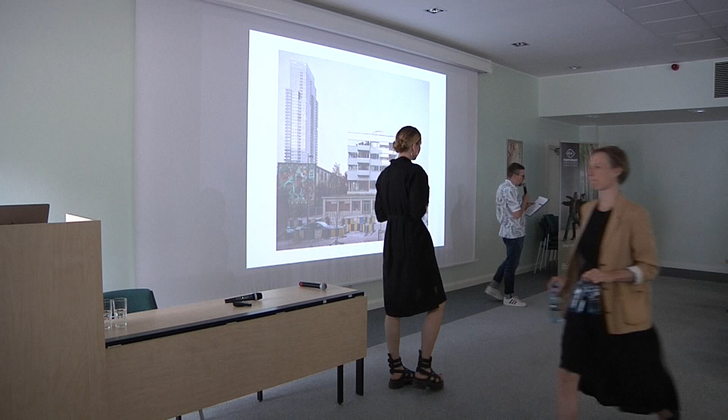Marija Katrina Dambe and Florian Beta, and the company is called NOMAD Architects. NOMAD is an architecture office focused on circular and timber architecture. They combine planning, research and hands-on work with activism. We understand the discipline of sustainable architecture as a collaboration between many actors. Thus, the aim is to work closely with construction teams, engineers, municipalities and all other players of the value chain.

Just one person on stage, only you. Yeah. Okay. Florian stays in. So, can you hear me? Yeah. I do. They do. You hear me well. Okay. If not, then show us. Try. Okay. Say something good in Latvian. Draugs. Yeah. Okay. Oh yes, you can start.

So yeah, I'm Marija from NOMAD. What I'm going to speak about is the gray zone of circularity, and it's me alone on the stage, and I feel quite a bit stressed because we are a super small office. Actually, it's just me and Florian. He's sitting there. And after the previous presentation with such large projects, we do very small things. But we somehow tick the box on use of materials and tracking their flows.

And so I'm going to tell a bit why the gray zone, because usually when we're invited to speak somewhere, we end up having to tell how we are doing things kind of legal, kind of loophole-ish. So I just honestly call it the gray zone, and that's kind of what we do. So just a bit of background. As we define ourselves as an office that deals with circular construction, circular architecture, we usually refer to construction to encompass that we're not only drawing, but we track down what happens afterwards.

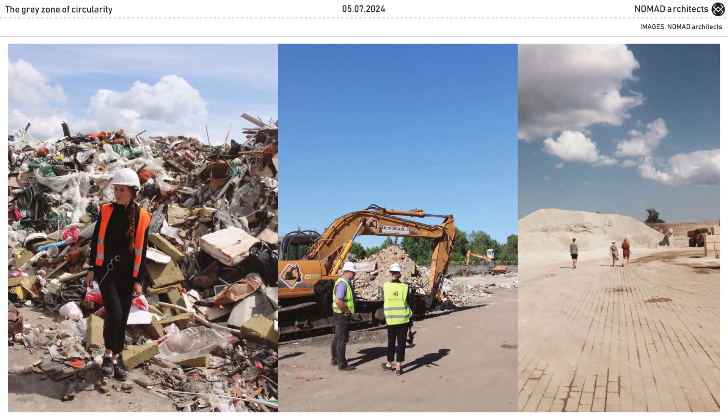So just as an introduction, this is our daily life. We are part-time at the office, but part-time we are on waste sites, demolition sites, also abroad, that's a Tartu construction waste site, and so on. So we spend our days between the things that we draw and actually looking at what happens to the buildings at the end of their time. But about it seeming like a very new thing, I usually like to point out that what we do is not new at all. Actually, not doing it is somewhat new.

And we can go back 2,000 years, and we find even ancient laws forbidding someone to make business by demounting and reselling materials. So kind of the ultimate thing we want to do right now. So we are pretending that it's something very, very new, when in reality it's not at all. And what we are doing right now, completely overusing the resources, this is the thing that is quite new.

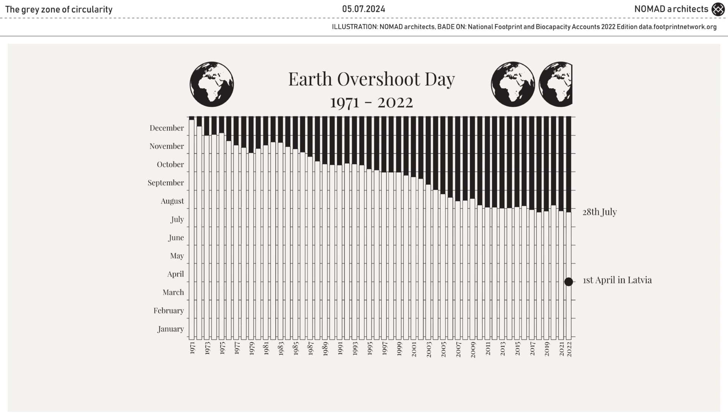And coming from Latvia, a super small country, kind of close to Estonia, it's often said that we should put these questions to countries that have more population, which are larger, wasting more, building more, and so on. And I usually like to show this graph, which is Earth Overshoot Day. It's the day when we have used the maximum resources that can be self-sufficiently replaced and start taking from the future. And if the world average is right now the end of July, the Latvian average is really bad. We're starting in April and already taking from our future resources. This is why even in a small country with rather little construction, we still have to speak about circularity.

So what I mentioned about saying that circularity is something new or feeling like it's something new, we have all these topics of new standards, how to reuse things, how to check the safety, how to build in a circular manner, and so on. And there's so much information on it, and actually we ourselves are also participating a lot in contributing to that amount of resources on how to build.

This is in Latvian, I'm sorry, but it's guidelines for Riga municipality for circular construction. And actually, if you track the last years, there's a lot being done in how to build, but there's kind of nothing done. So we're only speaking and always somehow getting stuck. And if you don't want to believe me that nothing is being done, then this is a project we did one year after we started our office.

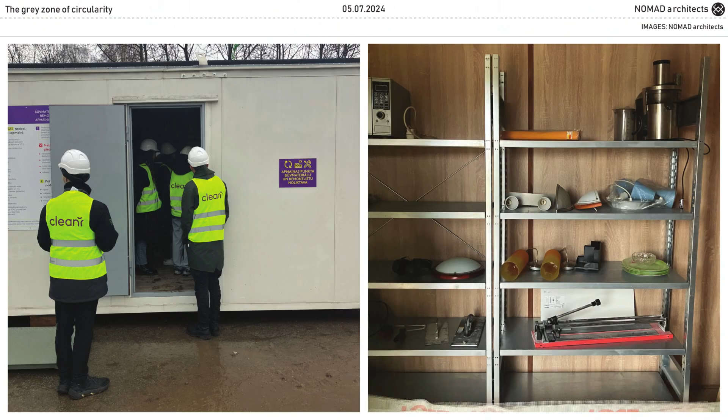So actually by the law, we don't have any circularity written in. We don't have reuse, we don't have upcycling, recycling, we have only downcycling possible in the law. And when you're building a new building, of course you have to account for where you are sourcing your materials. And you cannot say that you took a material from one building and brought it to the other, because you're an architect, you're not waste handling personnel. So actually you're not allowed to do that. So this is basically the reality, and this is what by law is understood and allowed to showcase circularity.

So what you can take is lamps, some old cutting devices and so on, actually nothing that has to do with the construction sector's waste in reality. So just to give you a background.

And then if we go further, this is a project that we did as research, I think 2 or 3 years ago. For the Riga municipality, we were asked to assess this abandoned 1970s service hotel, if this could be renovated in a circular manner. So again, it touches it on a very theoretical level. Can we do it? And then if we can, we will try to figure out how to do it by legal means somehow. This is also the reality; I will later have pictures from some other projects too.

I don't know why everyone feels that for the circular economy we should get the most run-down buildings, why we cannot experiment with something that actually has some material value left, but maybe that's the case. No one feels sad if this fails. But yeah, this stands quite centrally in Riga, not in the old town, but a rather centrally located building. And so we played through all the scenarios with other students of ours.

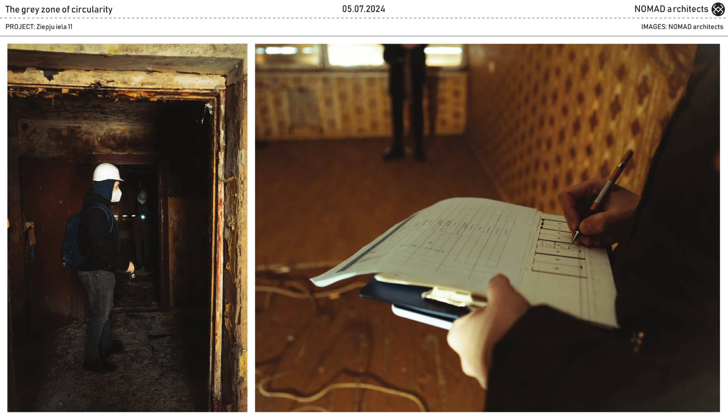It had only the room plans, but it had no documentation of what it's built of, anything. The city archive had no info on this building. It had only the foundation plan. That was the only info. So in a means of, okay, let's renovate it in a circular manner, we actually have to know what it's built of.

So we sent in the students and they mapped really floor by floor, room by room, all the materials they could find, looking behind at what it's made of, and made a lot of assumptions, and then tried to count also the volumes of those things, the condition of it, can it be demounted, can it not, and so on. And you can see the table then with all the mapped materials, giving them identification, and so on.

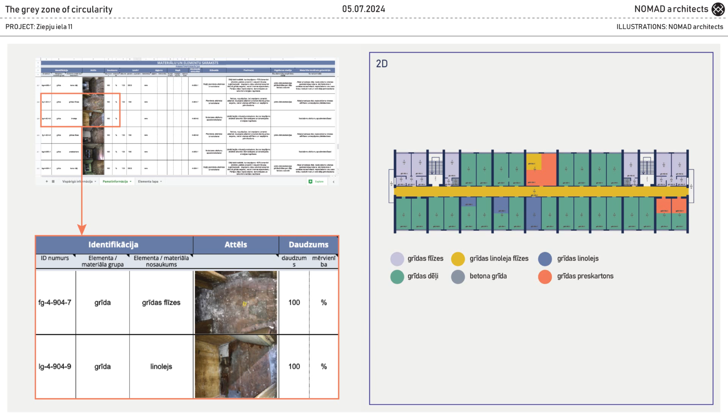And then mapping these also within the building, because there were all kinds of changes done also in the floor plans. And if it comes to the renovation phase, one has to be able to find those materials that we speak of and try to map these. And so at the end, we finally had what the building is made of.

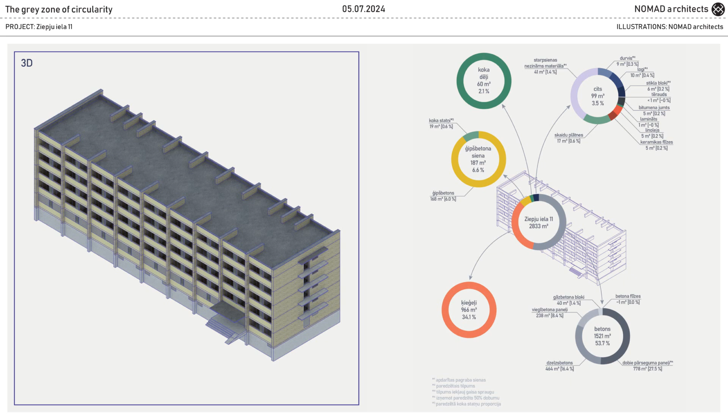But then the rest, we have bricks, concrete, timber, and then there's steel, bitumen, laminate, and tiles and so on. All kinds of pieces. So we had the idea of what the building is like, and then we started playing around, because the idea was we have to persuade the municipality that instead of taking this down and building new, they actually can renovate it and have circular benefits from renovating it.

The current floor plan, as I mentioned, it was a service hotel, so it meant that these were individual rooms. There was one bathroom per floor and one kitchen per floor. Two on each wing, basically one. And if the city had the plan to renovate this into an apartment building, so social apartments for large families, so at least three children or more, and additional social services, then these have to comply with a lot of other requirements of nowadays.

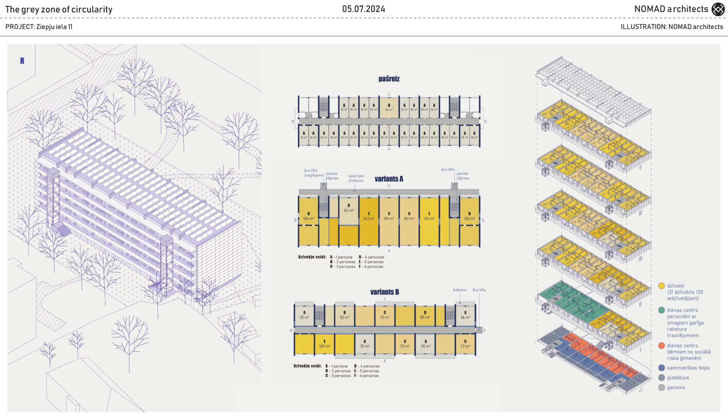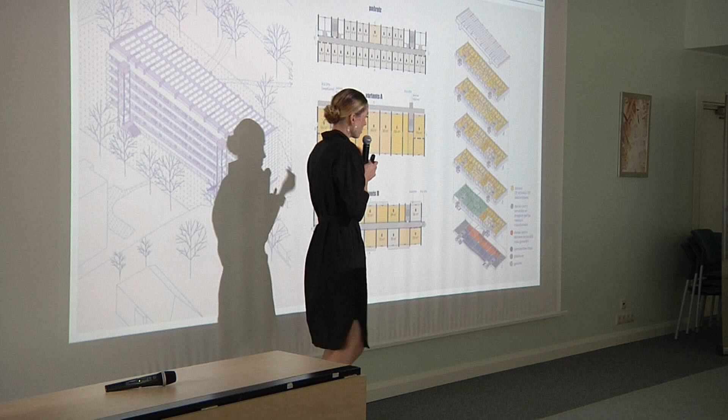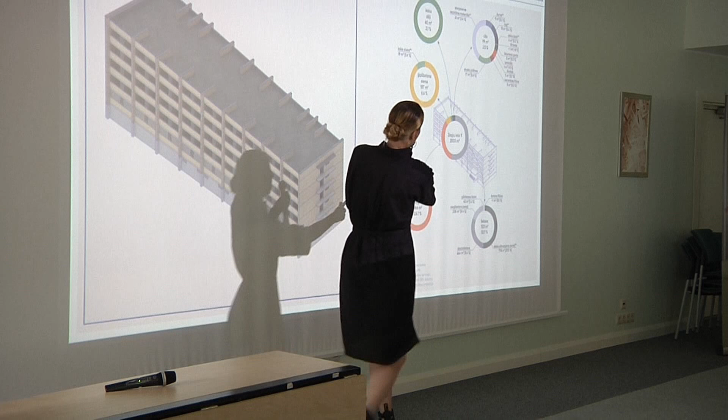What is usually required is cross ventilation within the apartments, of course the daylight conditions, sound, materials which withstand the use, and all kinds of things. So what we started with was we flipped two different floor plans to compare what can be done in the best case, and then used these as test case scenarios to count basically in each case how many materials would go away or what would stay within the building.

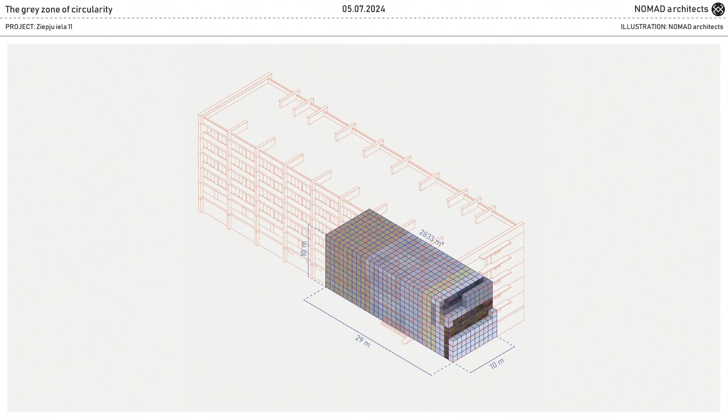And then we showed these results to the municipality and actually showed what happens if they don't do it. This is the full volume of the building, and if they decide to take it down and just start from zero, then basically they get a trash pile of 10 by 10 by 30 meters. This is what they would create. And they cannot say that the new building would be more sustainable because it's out of better materials if you create such an amount of waste.

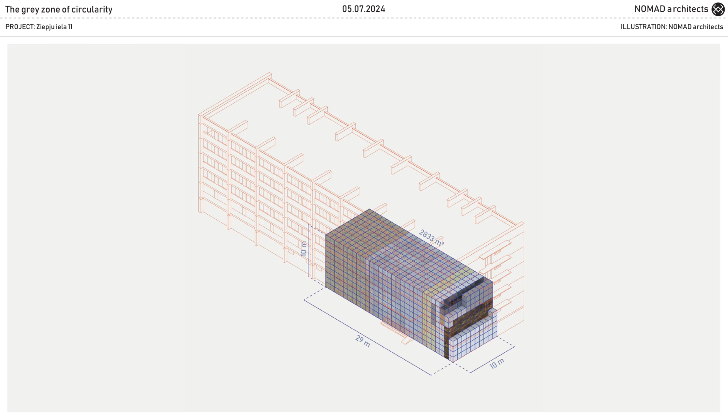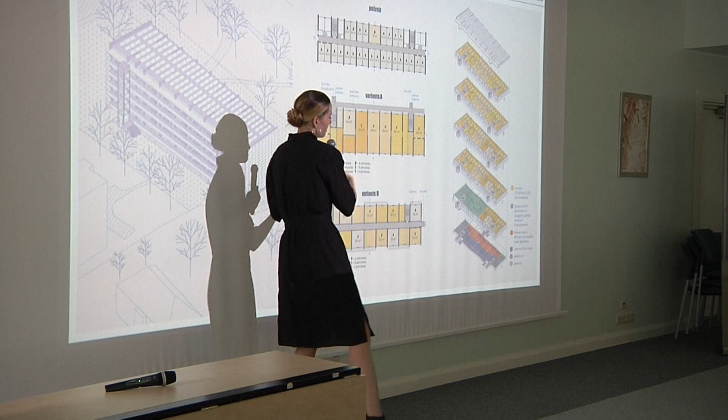And actually this visual became the key thing that circulated around the municipality and the slides of the politicians and so on, and the project got the funding. And there was an architectural competition from last autumn to this spring, and now it goes into a second stage, the detailing phase. So we did the pre-study, and this whole material with all the analysis was given to the architects so they can navigate and propose. Basically, what they have to do is take this material and come up with something better, more efficient, more interesting. So this was just a study of possibilities.

This one is not yet into the execution phase. When it comes to actually reusing the materials and moving them around within the building, that's still a big question of what will be done. On paper, those things looked quite good, and we can get quite high amounts of circularity there, but there's all the legal aspects which still have to be solved.

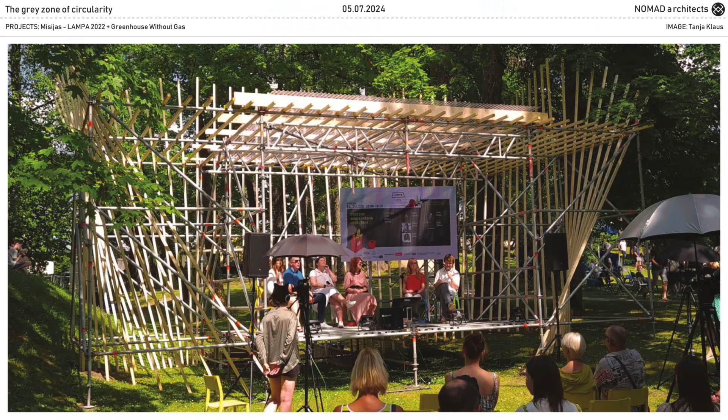The reuse actually, where it can happen quite easily, is of course at the level of installations, because there we often don't have to prove where we have sourced the material from, and we can even manage it in a way that we build it, we demount it, and we use it on our own within the office level of those materials. We never even pass it over to the client. So this was for one festival, we did a stage design where part of the material was scaffolding that was rented.

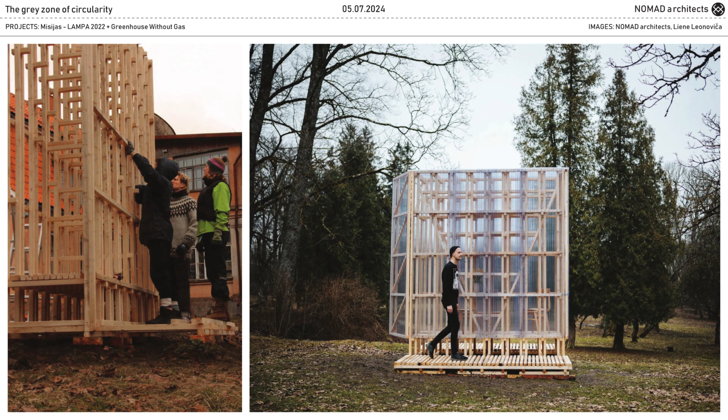We had full scale timber elements which were only rope tied so that we don't damage them, because we knew that nearby an artist residency wanted a kind of performance space greenhouse thing. So after the stage, we took it apart, and the artists there were given the manual and they built it into a smaller installation for them. This is no problem because, as an installation, the typical building laws don't apply.

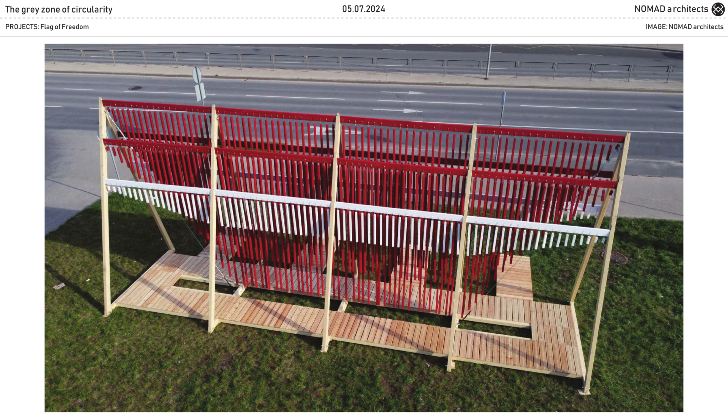This was another thing we did for the Riga municipality, for the restoration of an Independence Day event. There was a competition that the installation should be reusable in the next years, and preferably from natural materials and so on, and it sounded like a perfect match.

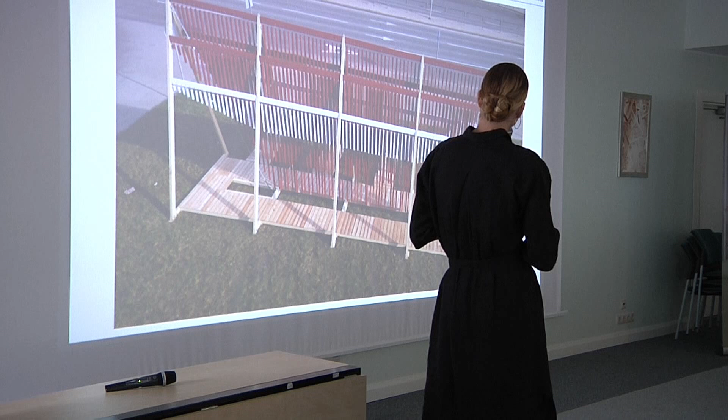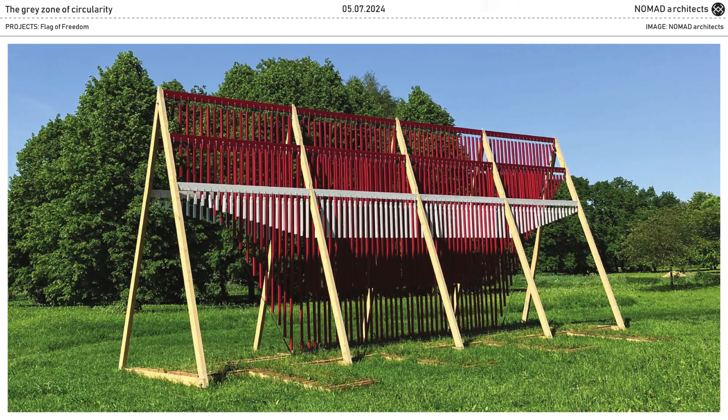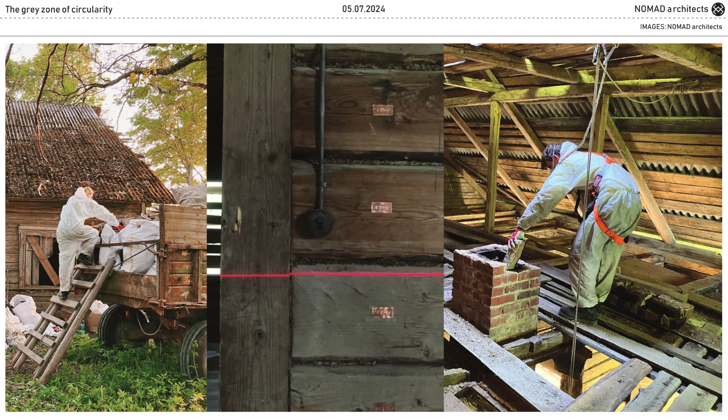A lot of what we do isn't really new - we're learning or relearning from the past. In many cases we go into the buildings ourselves and figure things out. This is an old log building where we've been cleaning it, numbering it, finding a way to demount it, and taking it apart step by step. Then we'll move it to another spot and reassemble it in a bit different manner. So a lot of this is looking back at how it was done in the past and adapting it to nowadays cases.

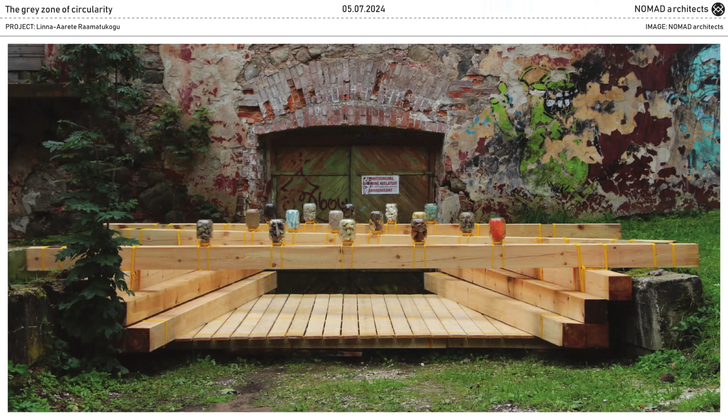But all of this is still case by case, one project at a time, and they're not possible to multiply. This is a problem when we know the construction sector is such a large thing - it's half of our waste, half of our raw resources, so many problems at the same time, and one project at a time is not enough.

So what we've been doing on the side is actually looking more at the industry and how we can improve the processes there by collaborating with the material producers.

This was an earlier tryout where we borrowed material for an installation from an Estonian timber material shop. They were up for the idea that we take this material - 6 meter long wooden beams, terrace planks and so on. We don't cut the material, we don't do anything, we use only rope connections to bind it and hang it from existing on-site concrete elements. We had the installation, then afterwards returned it, and this material went back on the shelves to be sold as new material. So this was one tryout, and we realized there is some interest from the industry.

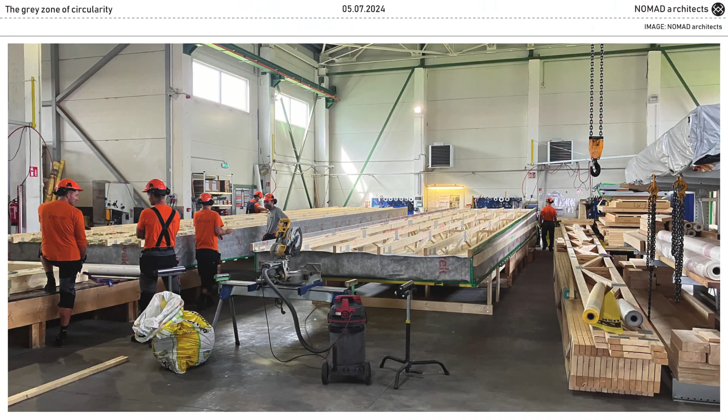We kept looking at what we can do, and where we can go outside of the gray zone and into proper processes. If we look at prefab construction, the majority happens in a factory, and the offcuts from your elements that you put on site are not by construction law immediately defined as waste. You can use them for the next things however you want - you don't have to deal with the aspect of it becoming waste, you can use it for the next purpose rather easily.

So we did this project for the Estonian Academy of Arts, for the Timber Architecture Research Centre, where we were prepared to help redesign their panel building system into a fully circular timber building system. This is part of the manual. The idea was to treat a modular construction as something that is actually modular.

You can stack the modules, restack them, reorganize them. You can take components out of the module and be circular with these, reassembling into other things. Or you can go into the single element level and be circular with that. So we ended up designing a system using the same kind of previous learnings - connections of things that can be reused, reassembled, taken apart rather easily, and hung together.

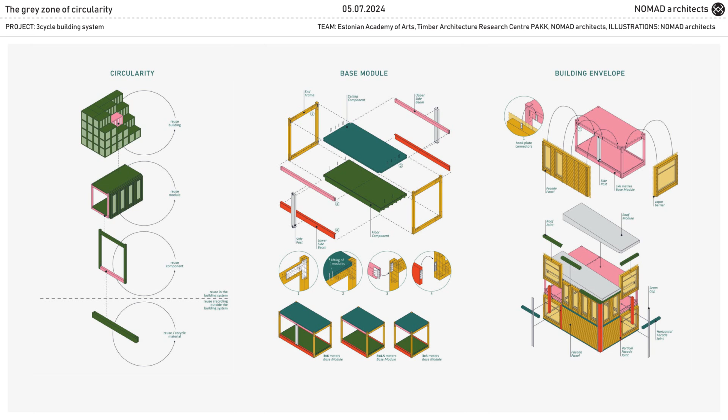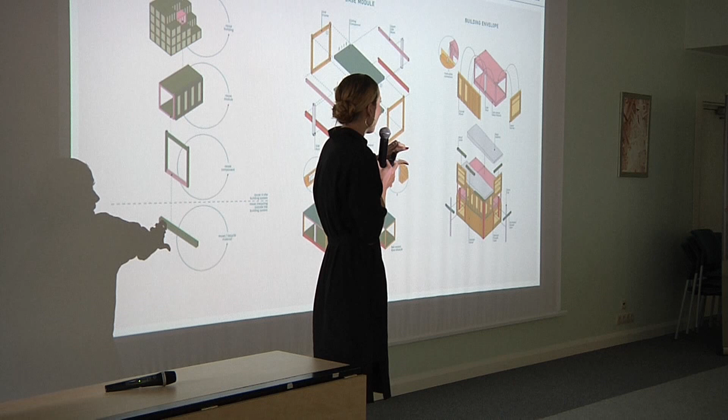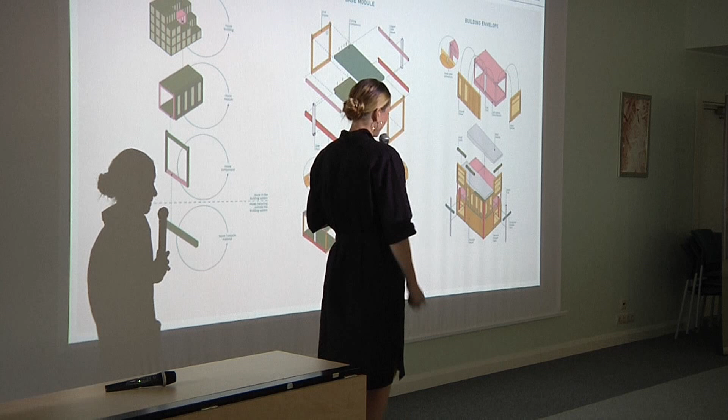We assembled those within the modular system, and also found a way to hang them on facades. The thinking is that right now we can make the best use of materials at the factory level, and at some point possibly it's also solved at the legal level. So now the buildings are being built so that they can be demounted, and in future, once the legal side is fixed, these can actually be demounted and remounted. But we're speaking of a time span of 10, 15, 20 years or more, where hopefully the issues I mentioned on the law side are actually addressed.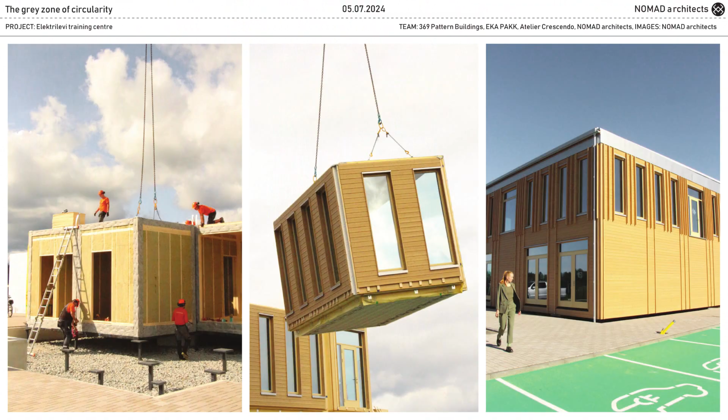We were quite happy that with the system we developed, we could also do the architectural design of the first pilot building. Now the system is being used by quite many other architects already that I've seen. We could design the Elektrilevi training center within the system, and tracked things further on site.

Finding things that work or don't work, making sure that there are no nail guns present on the site - apparently a common thing that someone still runs around with them - and finding all the things that make this disassembly approach work. So this one's no gray zone, this is how it can be done.

But there's a question: if we would say now to take it apart and move it somewhere else, how is that treated?

In theory, this one can be reassembled.

There's another aspect where in the timber production industry, meaning massive timber like CLT and glulam, they have their own waste from the processes. This is the most recent thing we've been starting to look at. They have rather standard elements that usually stay over, windows, doors, cutouts with small differences but quite similar dimensions. You have typical offcuts from ends of plates to have straight ends, and you have a large amount of the same kind of elements.

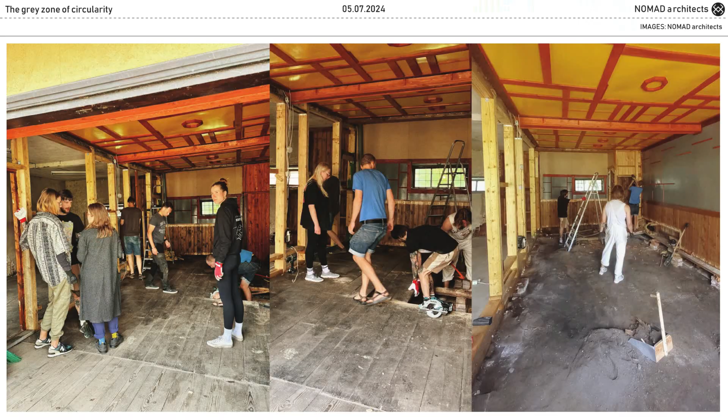How can we construct something with these? Because as long as these stay in the factory, they are actually not waste, and you can legally work with them. But to come to the conclusion, we're not forgetting the trashy buildings that we are given to experiment with.

We're also trying to bring as many young professionals into this as possible, like here with construction managing students and other creative industries together, to push them into things that at the start look really trashy. How can we clean it up, renovate it in a way that we start to see again the value in those buildings that were before abandoned or vacant.

This is another project with students, exactly what you saw. The city is very happy this will be a circular thing, but it's so fallen apart that there's kind of nothing to say. Still, running through the process with the students, they learn how to do the material mapping, how to do the searching, and then eventually they can apply it to better quality buildings and cases.

We have a lot of vacant past-century buildings in Latvia, and we just get more and more of them. So finding ways, and also working with the community, how communities can take back those vacant buildings and find other social, cultural uses for them, seeing also the circularity in these really large built volumes.

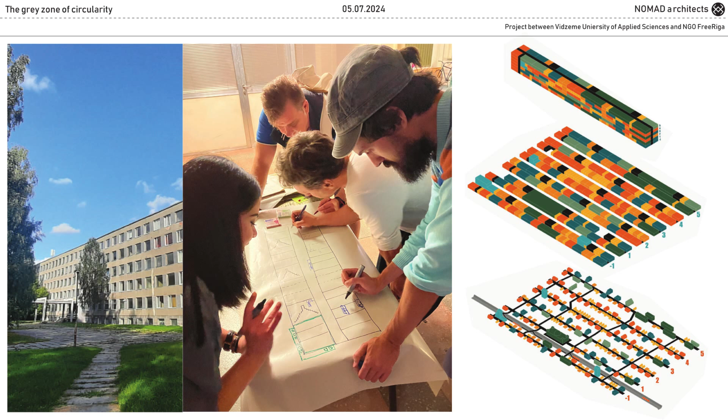And the very, very last thing: we were quite happy that everything starts to move into circularity in a good direction. There are things still stuck, but it's slowly moving, and competitions are starting to happen, and everything is good. And then we joined - we do also side research and European project-funded research, and we joined this chemicals and construction materials research, which is about enabling circularity in the future.

We learned from the chemists, it's really bad - actually a lot of things we thought we can reuse, we cannot, because of using a wrong outdoor paint, and we cannot in future bring this material indoors because it has cancer hazard, or similar issues. This is a new learning curve for us, to actually pay attention when we design new things, that in future it's not only about ease of disassembly, but also all these health aspects that have to be addressed, and where the risks are. So the past year has been a lot of writing and figuring out the materials and their qualities or risks as well.

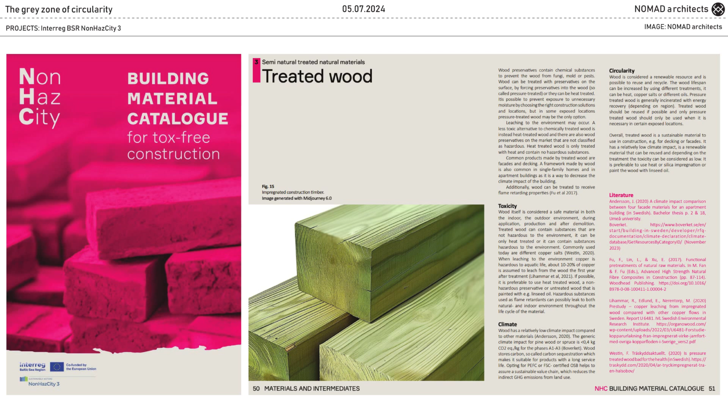I really like the name of the office, NOMAD - you guys not staying in a place, traveling, but the houses are non-nomad things, they stay. Not all of them, so many of our projects really move site to site. So you try to make houses move around? Yeah, it's a case which happened after we picked our name. Nice, so you have actually discovered something.